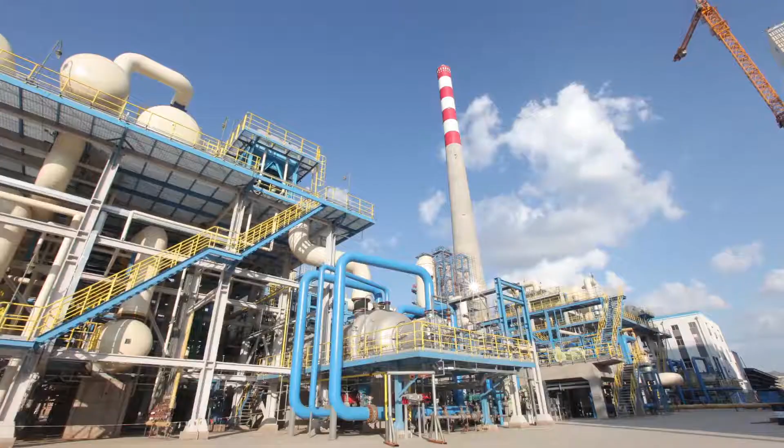A global perspective strategy, a global competition dream, a passionate enterprise. Keep pursuing innovation, aims to pioneer.

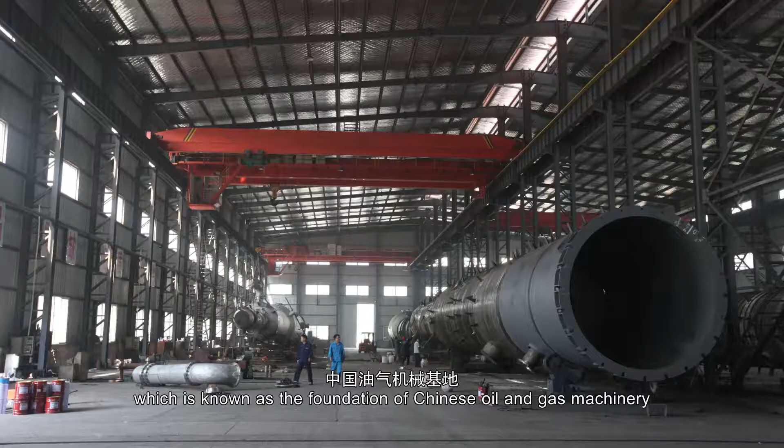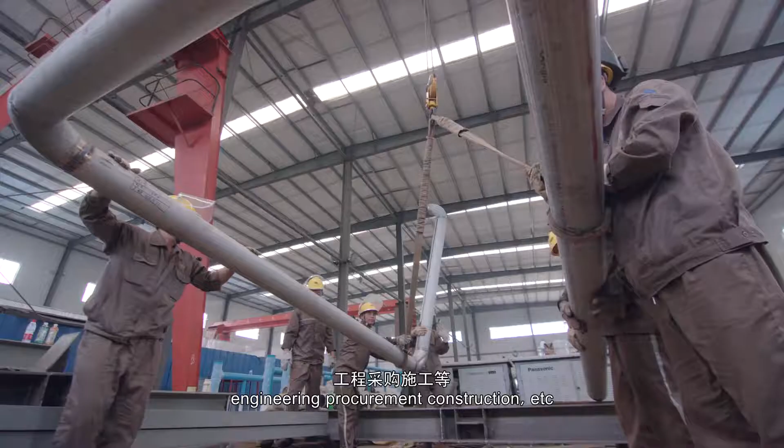HDC Group, the export of Chinese oil and gas machinery industry. Established in 1994, HDC Group is located in Honghu City, which is known as the foundation of Chinese oil and gas machinery. It is an integrated company specialized in research, design, manufacture, installation, engineering, procurement, construction, etc. in the oil and gas field, aiming to become the pioneer of the global oil and gas machinery field and the main force of the Chinese oil and gas machinery industry.

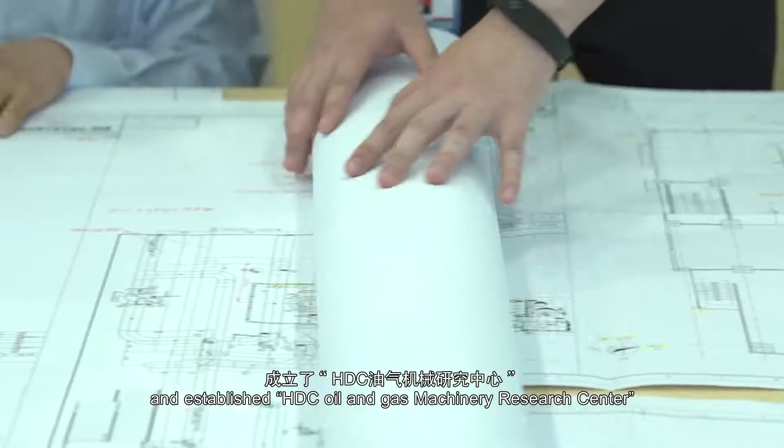Technical supports. HDC Group joined hands with China University of Petroleum and established HDC Oil and Gas Machinery Research Center, owning a research and development team consisting of many domestic well-known specialists and professors. It also owns many nationally appraised technological achievements and proprietary intellectual property rights.

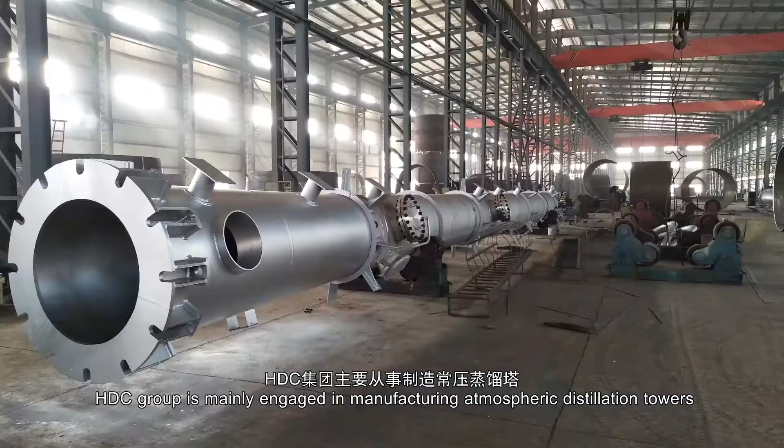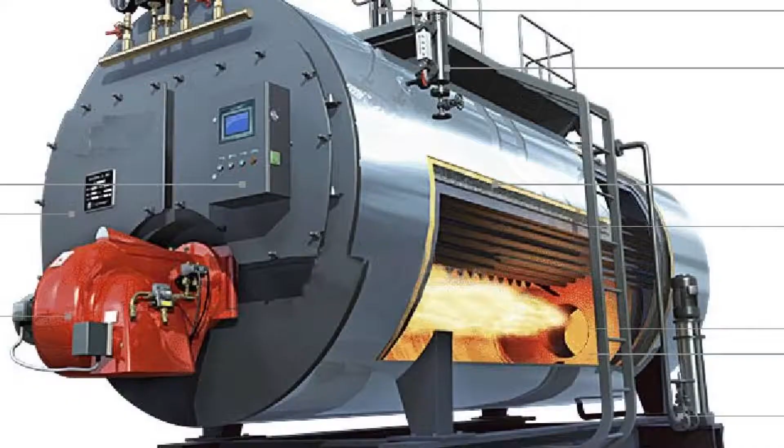HDC Group is mainly engaged in manufacturing atmospheric distillation towers, vacuum towers, stripping towers, tower fillings, heat exchangers, furnaces, boilers, electric desalination systems, reactors and pressure vessels.

During the development of the last 30 years, HDC Group successfully managed more than 100 projects in the oil, gas and petrochemical fields. Since 2015, HDC has paid more attention to exploring the international market and providing first-class service for international customers. HDC earned respect through its advanced technology, reasonable price, and professional services.

Project experience: 100 to 5 million tons per year ADU and VDU refining turnkey project, 300 to 3 million tons per year hydrogenation refining turnkey project, 400 to 3 million tons per year coking unit turnkey project, 300 to 3 million tons per year catalytic cracking unit turnkey project, 300 to 3 million tons per year C4 comprehensive production line turnkey project, 100 to 3 million tons per year wax oil non-hydrogenation refining turnkey project, and other petrochemical project EPC or turnkey solutions. Refining process:

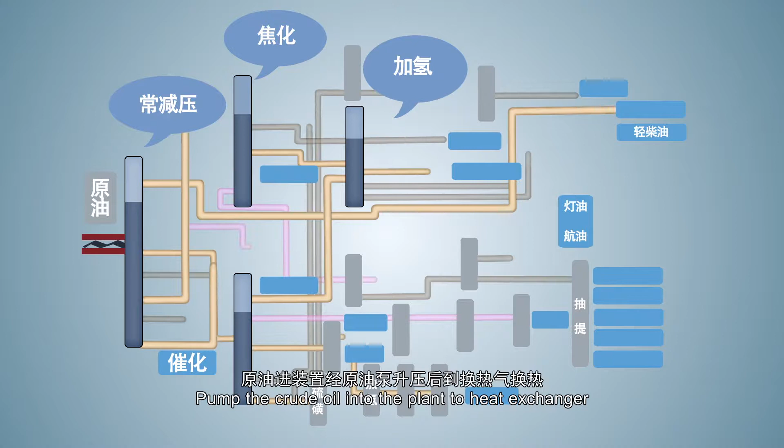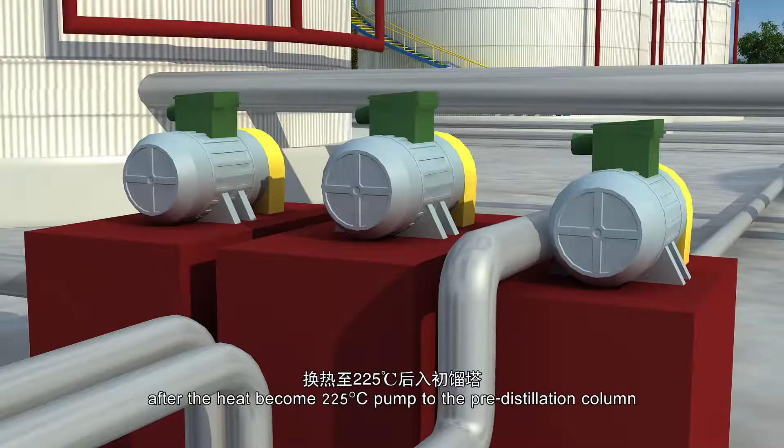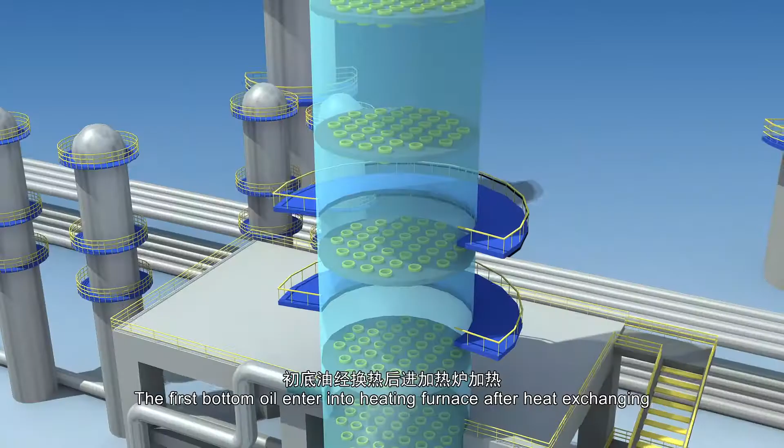Pump the crude oil into the plant to the heat exchanger. After the heat reaches 225 degrees centigrade, pump to the pre-distillation column. Distribute the vaporized hydrocarbon fraction to the top tower as reformation raw material. The first bottom oil enters the heating furnace after heat exchanging, and then enters the atmospheric tower to separate the gasoline, solvent oil, kerosene, diesel and other distillates, etc.

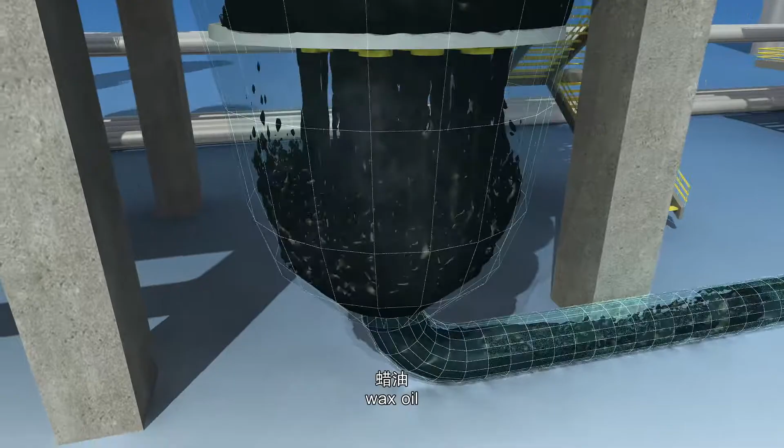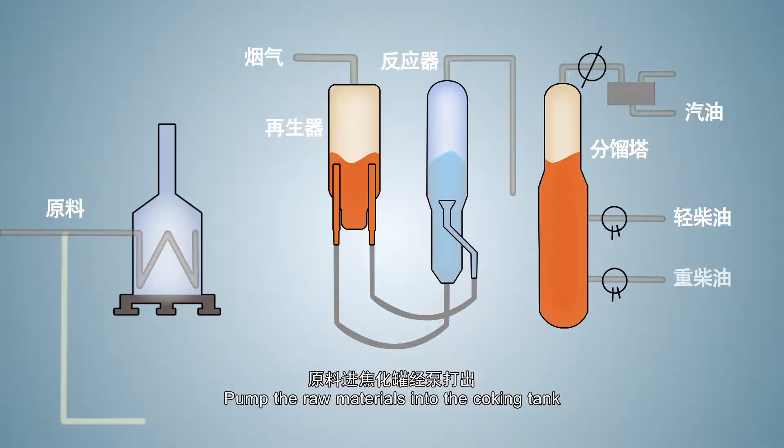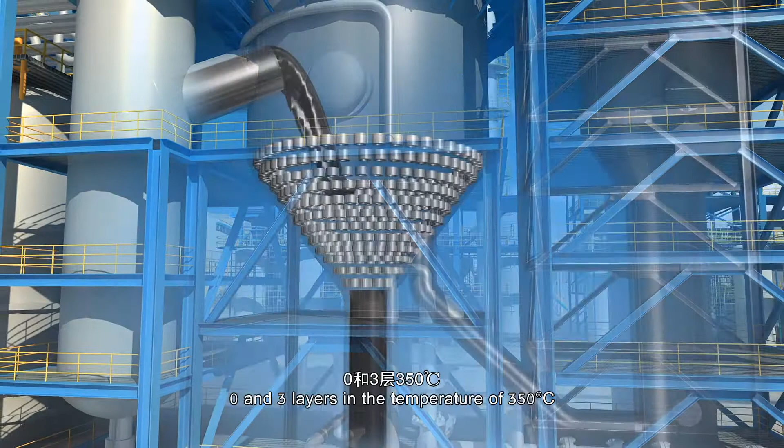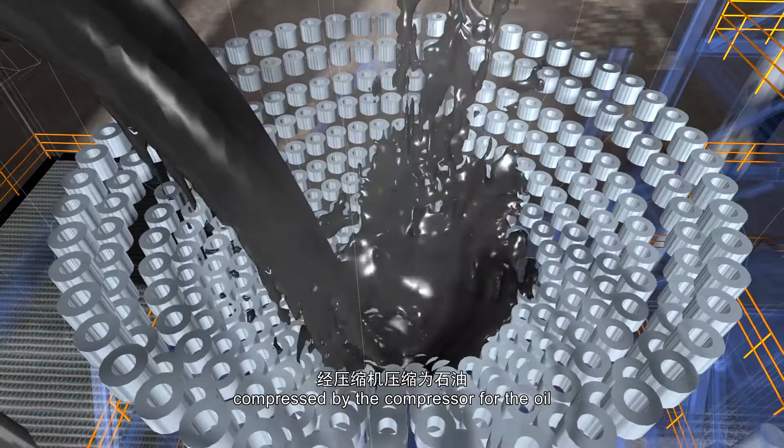Pump the raw materials into the coking tank. After heat exchanger preheating, they enter the heating furnace and the convection fractionation tower at 0 and 3 layers at a temperature of 350 degrees centigrade, contacting and exchanging heat with the coke tower's high temperature oil and gas. The fractionation tower top cutting gas is compressed by the compressor for oil, liquefied petroleum gas, diesel oil, bottom oil and circulating oil.

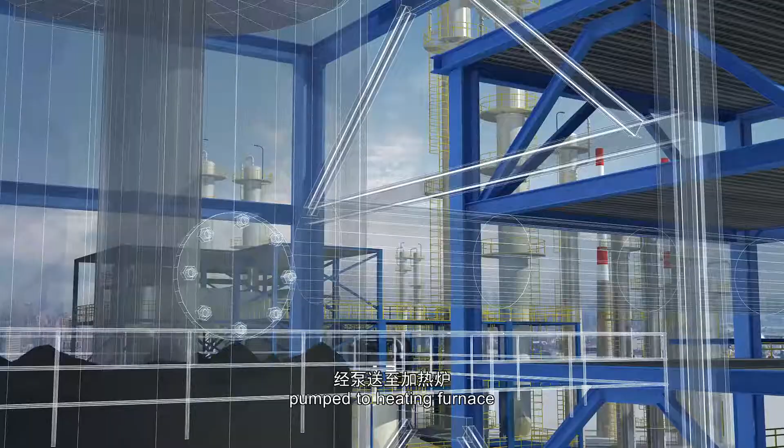Pump to the heating furnace, the radiation section rapidly rises to 490 to 500 degrees centigrade. Through the four-way valve it enters the coke tower, condensation generates coke up to a certain height, then the tower's four-way valve switches to another preheated coke tower.

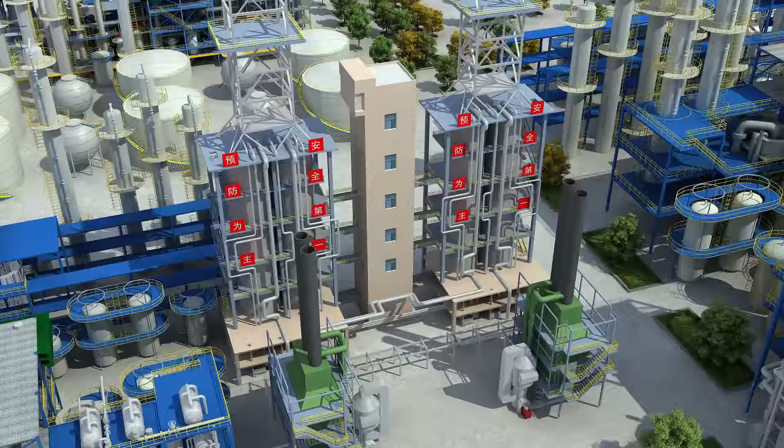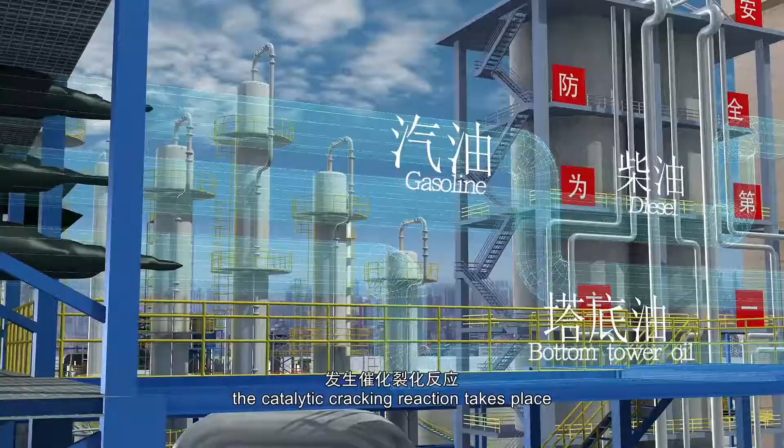The vacuum residue, atmospheric residue, and straight-run wax oil constitute the raw material of the catalytic cracking unit and, after being preheated and mixed, enter the riser reactor under the shock contact of the regenerated high-temperature catalyst. The catalytic cracking reaction takes place, generating reaction oil that goes into the fractional distillation tower, from which we get distillation slurry, diesel, crude gasoline, and rich gas.

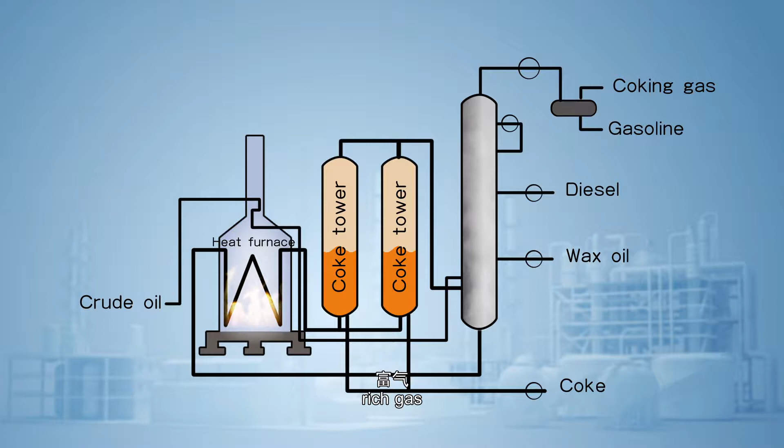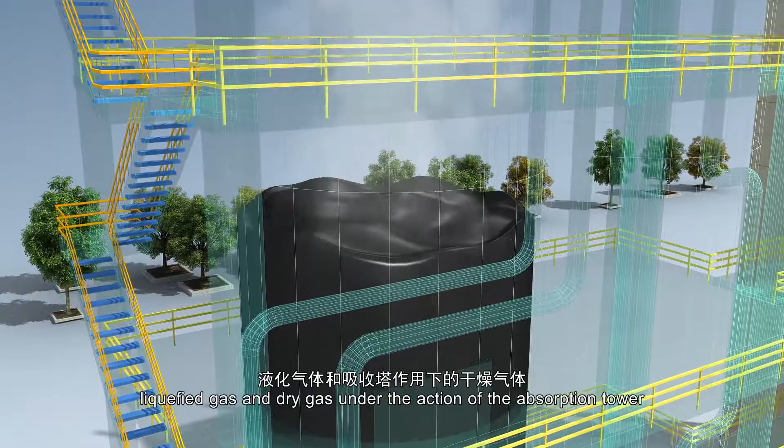Crude gasoline and compressed rich gas can be fractionated into stable gasoline, liquefied gas and dry gas under the action of the absorption tower, analytical tower, and stabilizer tower.

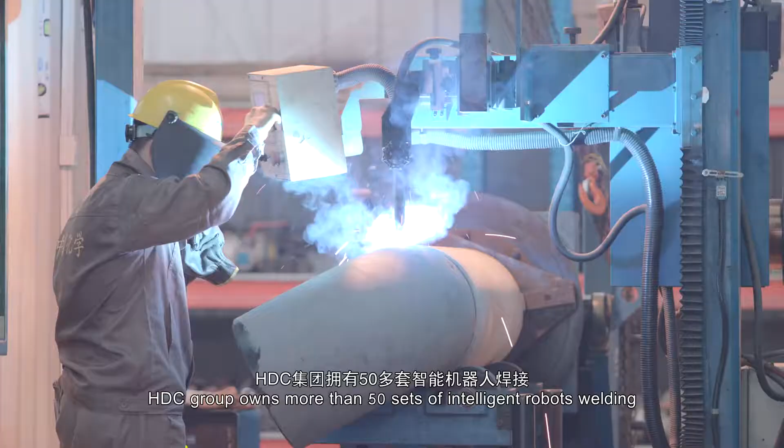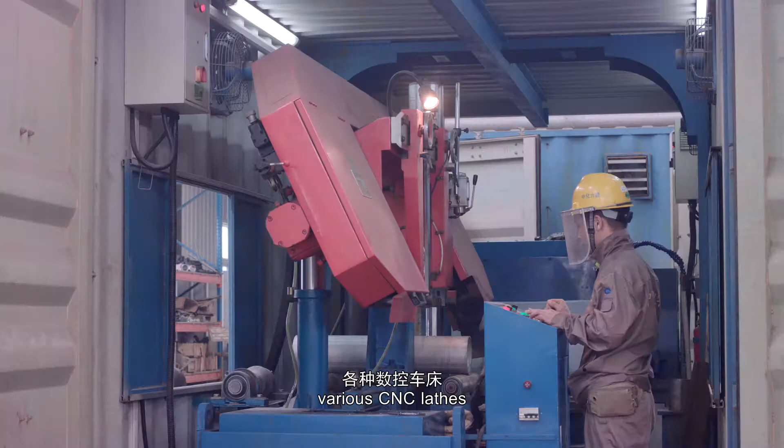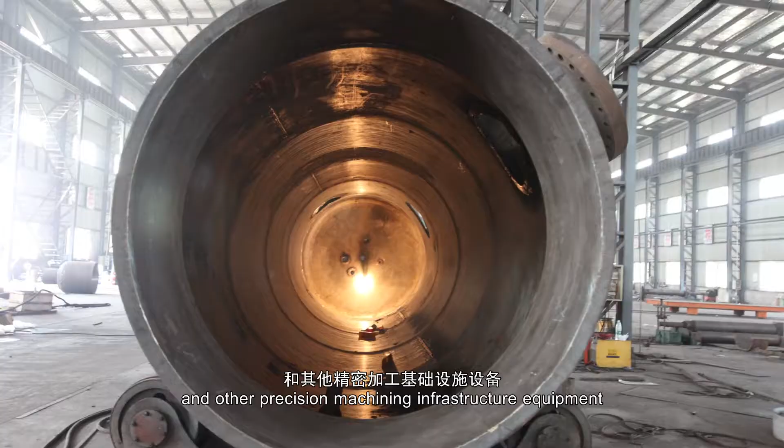First-class facilities bring up first-class machinery. Covering an area of 282,000 square meters, HDC Group owns more than 50 sets of intelligent robotic welding equipment, large CNC laser cutting machines, numerical control bending machines, various CNC lathes, a radiation flaw detection room, hole punchers, tower filling machines, and other precision machining infrastructure equipment, with national first and second grade special equipment design and manufacturer qualification.

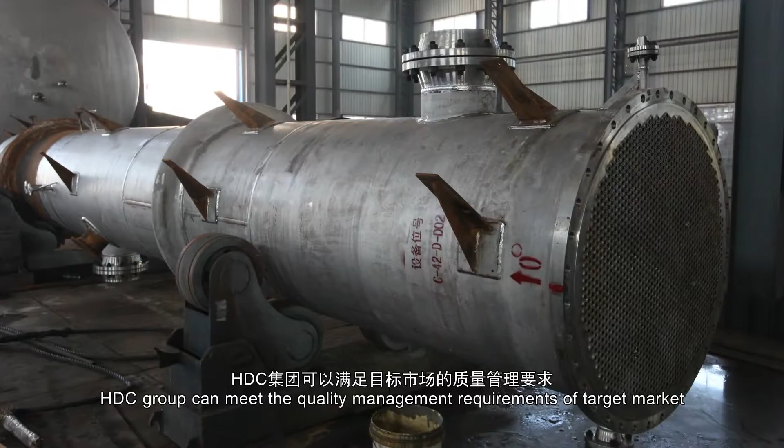Certification: company certifications are fully qualified. HDC Group has passed the ISO 9001 Quality Management System certification, the People's Republic of China Special Equipment Design Permit, the People's Republic of China Special Equipment Manufacturing License, Class A Engineering Design Qualification, and the Petrochemical Industry Class A Engineering Consulting Unit Qualification Certificate. For overseas markets, HDC Group can meet the quality management requirements of the target market in strict accordance with the relevant quality standards on standardized designing, manufacturing, and testing.

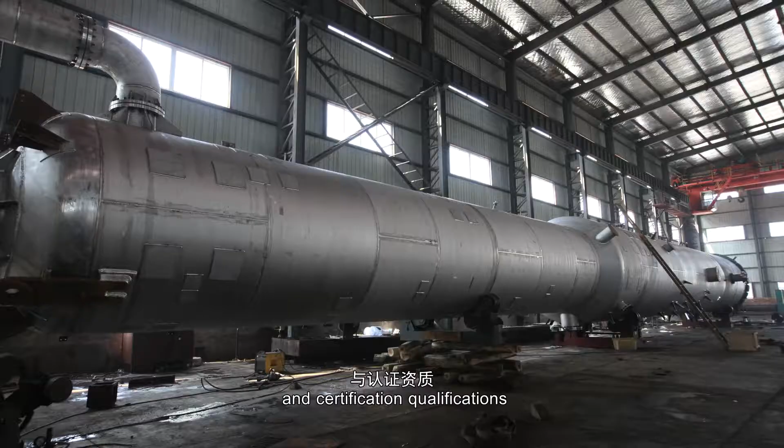A complete quality assurance system and certification qualifications help HDC Group lay a firm foundation to win the market and customers.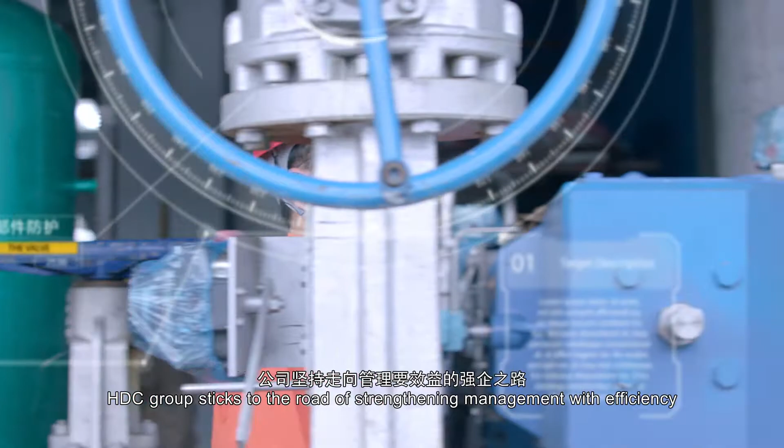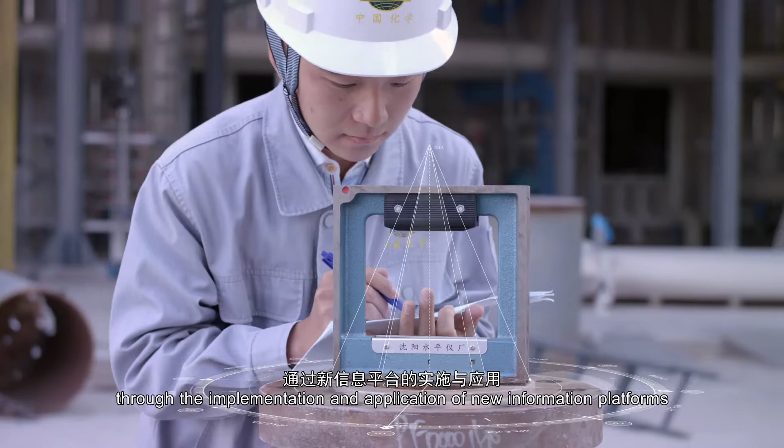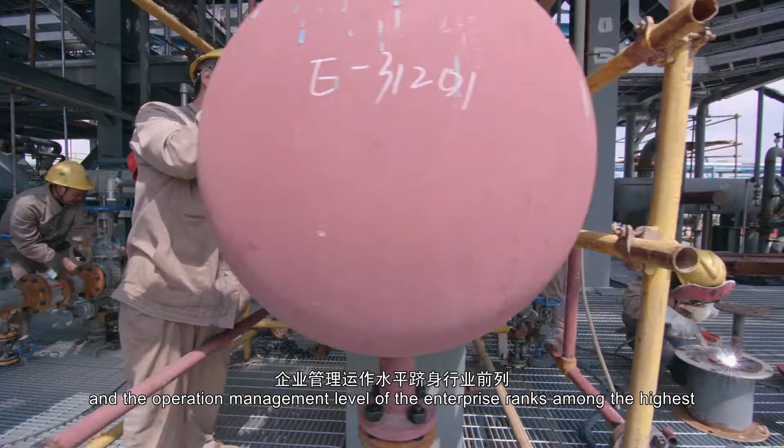Based on standardized management, HDC Group sticks to the road of strengthening management with efficiency, and has vigorously promoted the implementation of information management and digitalization through new information platforms such as ERP and OA. The management cost has dropped significantly and management efficiency has greatly improved. The efficiency of comprehensive analysis, processing, and application has been remarkably improved, and the enterprise's operation management level ranks among the highest in the industry, with management efficiency steadily improving.

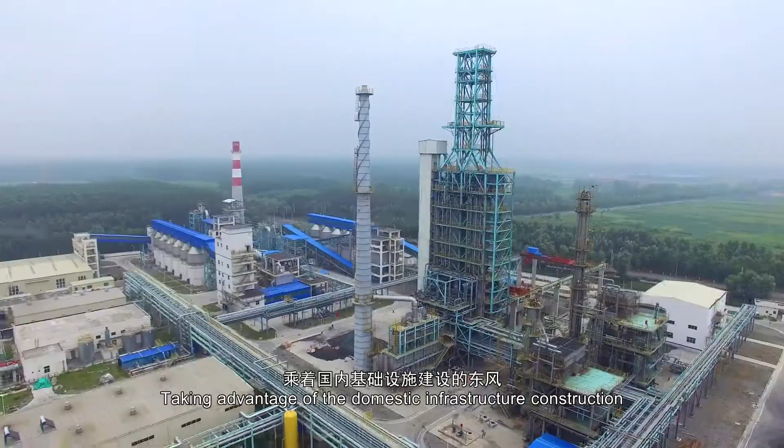Looking ahead, we are full of pride. Taking advantage of domestic infrastructure construction and the steady progress of the nation's Belt and Road Strategy, as well as the unprecedented development in the fine chemical industry, HDC Group will keep adhering to the development goal of becoming the leading brand in the global petroleum industry, using wisdom and dedication to compose a new galloping chapter.